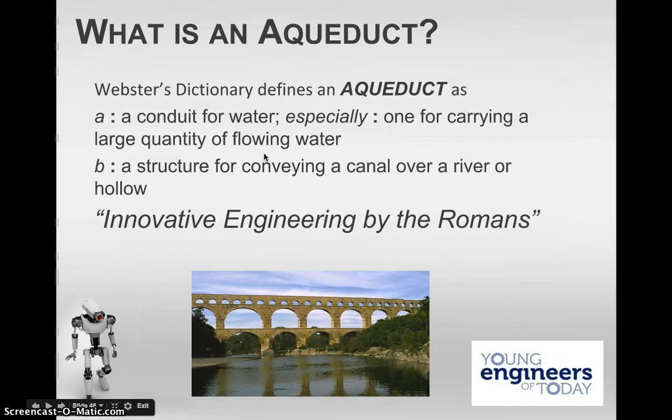Aqueducts were created by the Romans as the Roman Empire grew. And they developed this extensive system of aqueducts to deliver surface water by gravity on a gradient to cities. As the cities grew, especially in Rome, the city grew and the Tiber River wasn't large enough to continue growth.

Water is delivered to fountains and baths where citizens collect and use it. These fountains were very elaborate and quite large. And the other positive that these fountains did was, especially in warmer times of the year, it would allow mist and moisture in the air as it was splashing about through these fountains, actually cooling off the areas of the city. It allowed cities to grow in size.

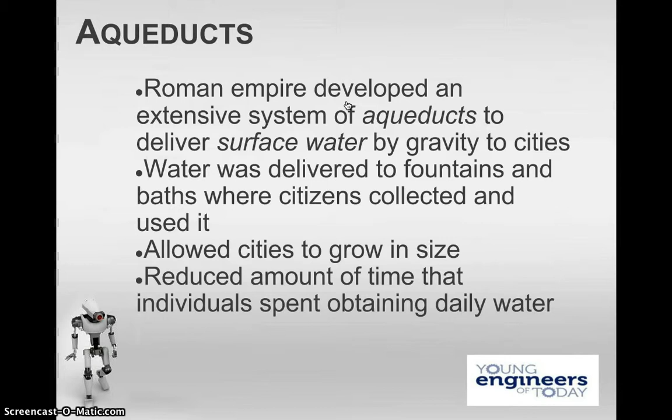Water and food are highly important to life. And when you are spending most of your time being a hunter and gatherer, it's hard to develop culture, philosophy, art, science, math, recording history. It becomes a burdensome task because you are spending all your time trying to either find fresh water or find food. When you're able to do that and you have sustainability and a city is able to grow and society is flourishing, it's a result of having water and food at the basis.

The history of the aqueducts: at first the Romans' recourse, as I said, was the Tiber and wells, but water obtained from these sources was polluted because of the growth of humans and humans polluting things, which still happens today. That's the reason they had to find a new source of fresh water.

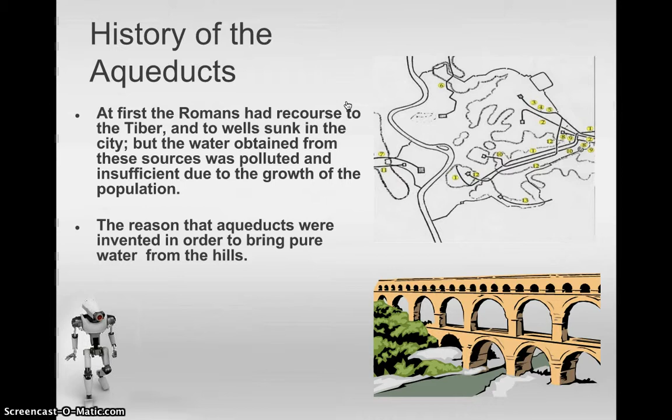Aqueducts were invented in order to bring pure water from the hills. The date the first aqueduct was assigned is 313 BC. The number of aqueducts was gradually increased, partly at the public expense and partly by munificence of individuals. So people were paying for it directly.

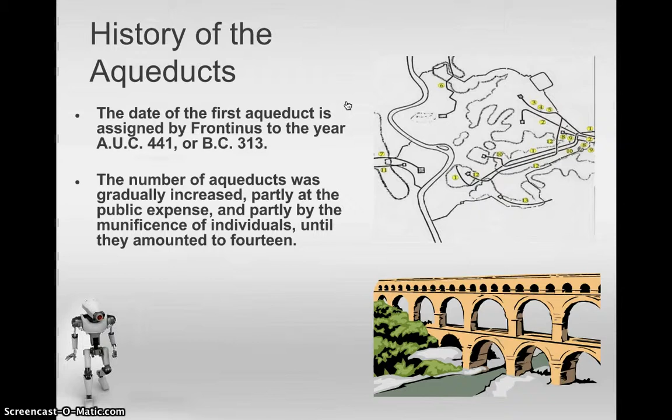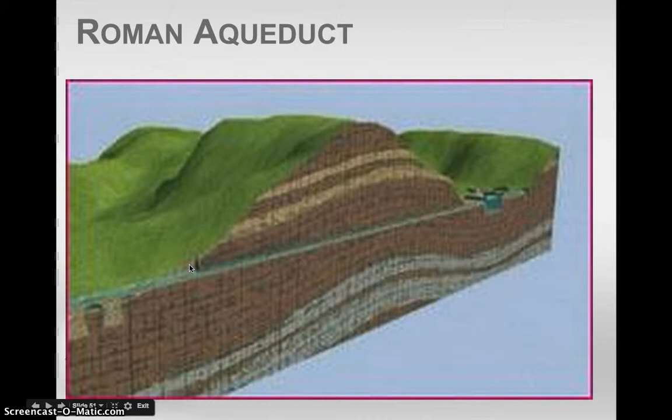Now, these are some of the major questions that need to be considered when designing an aqueduct. Obstacles, as we talked about, the engineers run into when designing these: valleys, hills, keeping the water clean while it's moving. These challenges were overcome by creating these aqueducts, these tunnels, these filtration areas. Okay. And I would say today's modern version of aqueducts is a mass array of underground plumbing that ships water all around and removes it as well through sewage pipes.

Here's a side view of the anatomy of an aqueduct system, starting at the source here, and the drop shafts, the settling tank. With water, things that are more dense will drop to the bottom and the water will flow. So it's almost a filtration process. Tunnel and shafts, tunneling through help create airflow.

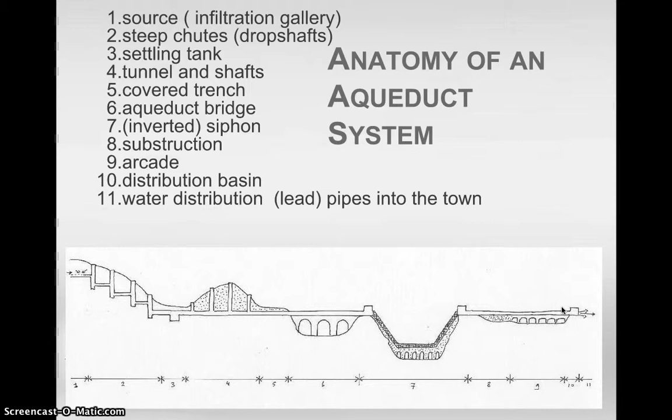So as they move through, you have your arcades, you have your inverted siphon, which, as long as this one side is higher here and the pressure is stable, will move through these valleys and actually push the water up. And then the only downside here is the lead pipes. Lead pipes were even still used in the 1800s, but you'll get lead poisoning.

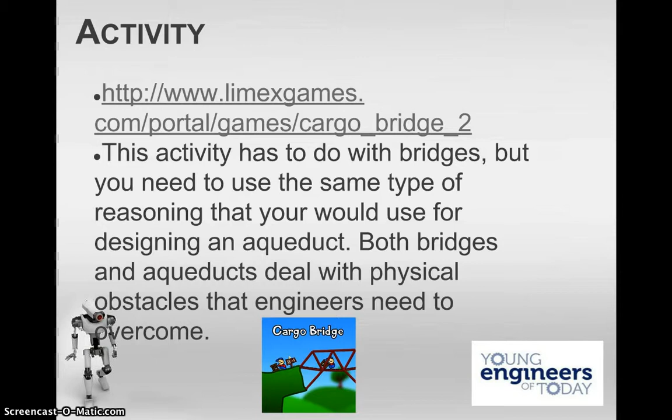Now, this link above is called Cargo Bridge. Granted, you might be wondering, Mr. Taylor, why are we doing bridges? Now, the point of this is, this actually has to do with bridges, but you need to use the same type of reasoning that you would use with designing an aqueduct. Both bridge and aqueduct deal with physical obstacles that engineers need to overcome. So go ahead and play that. It's an enjoyable game.

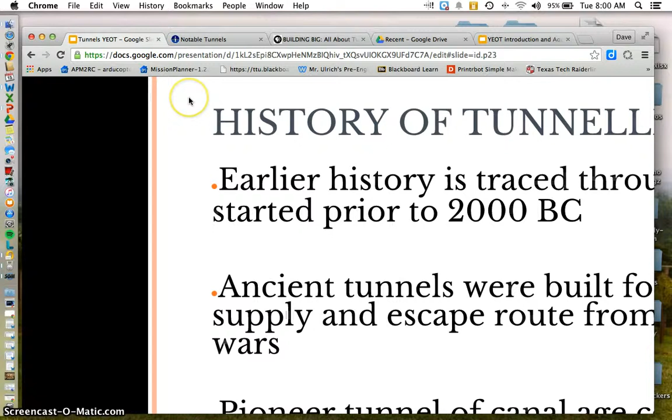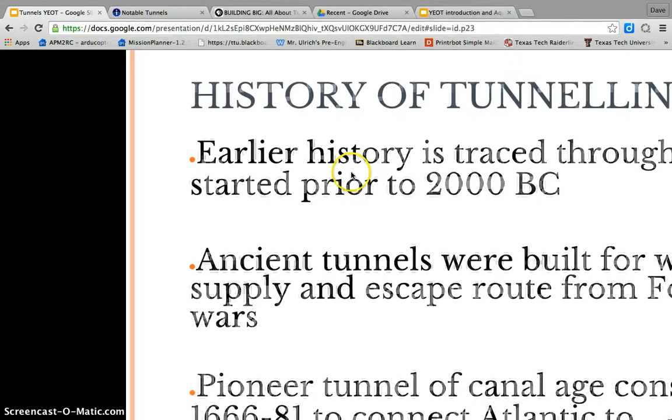Now, just a few review questions that'll help you recap after watching the videos and etc. Okay, we're going to change gears now, and we're going to go with tunnels. Let's get this presenting to you. All right.

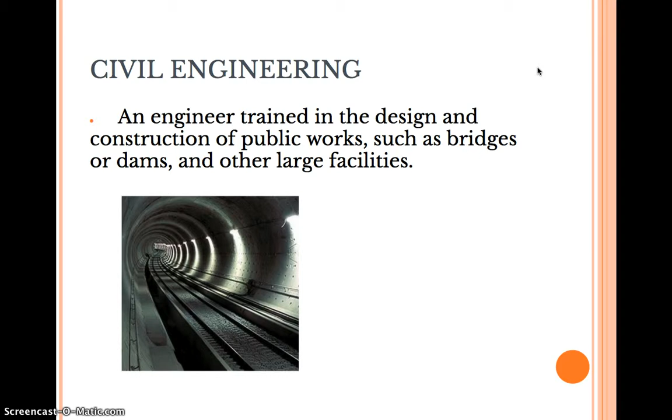Okay, tunnels. Tunnels are created by civil engineers. Civil engineers are trained in the design and construction of public works such as bridges or dams and other large facilities. Once again, I have a video here that I recommend you watch. It talks about what engineers do.

And then realizing how long some of these tunnels are, like the English Channel Tunnel that connects England and France, is 31 miles long. Imagine being underground for 31 miles. Very impressive. Amazing engineering.

History of tunneling. Early history is traced through mining, started prior to 2000 BC. Ancient tunnels were built for water supply and escape routes from forts during wars. So like secret passageways.

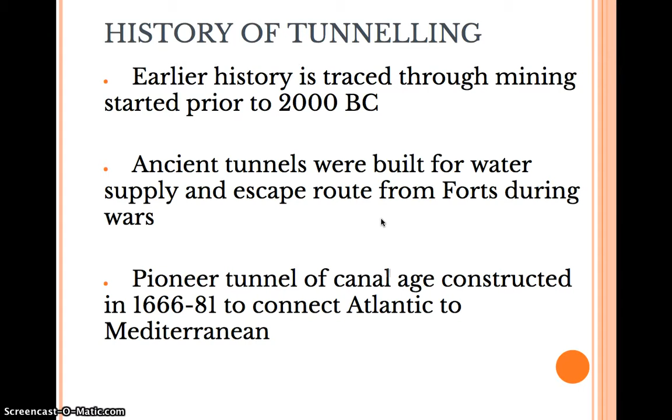Pioneer Tunnel of the Canal Age, constructed in 1666 through 1681 to connect the Atlantic and Mediterranean, lower European, Northern Africa area. Gunpowder was used for the first time in tunneling there due to the importance of water transportation. The canal system developed in England and other countries in the 18th century, leading to construction of a number of tunnels.

If you go in the English countryside, there are all these small little canal rivers that were built off main rivers to help with transporting goods. I was in England this summer and saw them. They're quite impressive, but they're all over the countryside for shipping things. So it's more efficient.

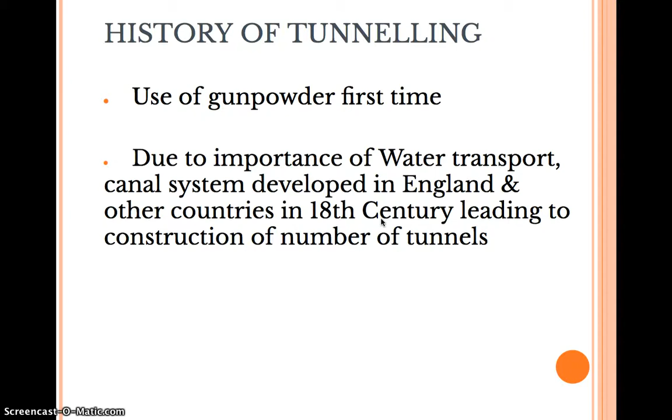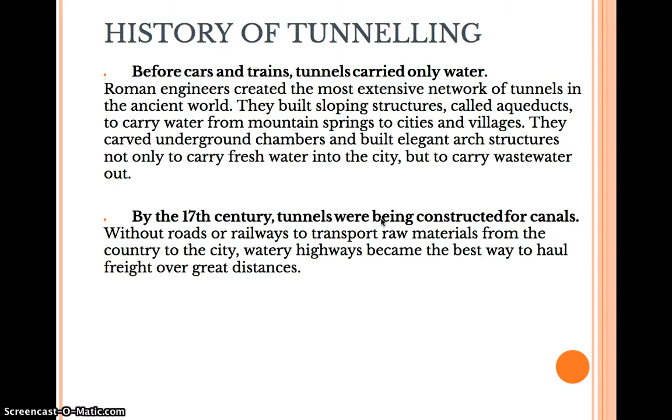And before cars and trains, tunnels carried only water, as we talked about with the Roman aqueduct. By the 17th century, tunnels were being constructed for canals. Because we didn't have roads for cars and vehicles or railroads for trains, waterways were the highways to move freight over great distances.

With trains and cars came tremendous expansion in tunnel construction during the 19th and 20th century. The development of railroads and motor vehicle transportation led to bigger and better and longer tunnels. If you ever had the opportunity to drive through any mountainous area in the U.S., there's a lot of tunnels.

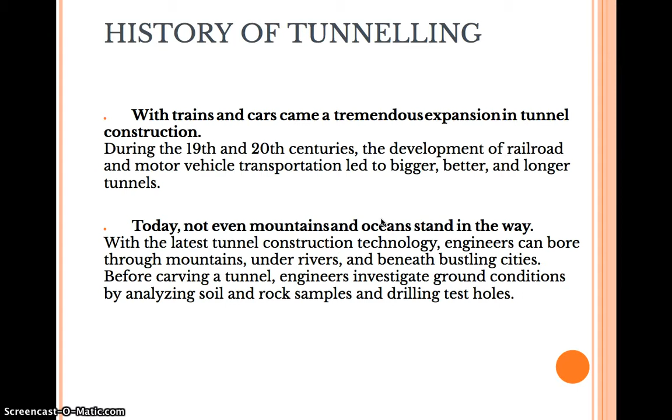There's tunnels in the Appalachian Mountains in the Northeast. I grew up in western Pennsylvania, and there's quite a few tunnels around Pittsburgh. Today, not even mountains or oceans stand in the way. Okay. Some images of the evolution of tunnels.

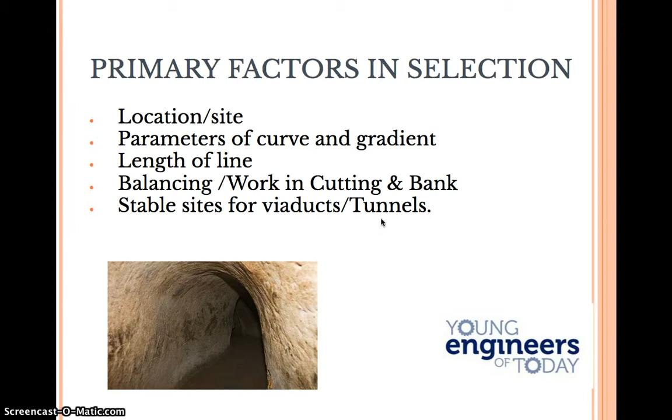Now, primary factors in selection: the choice of tunneling method may be dictated by geological and hydrological conditions, geo meaning earth, hydro meaning water, cross-section, length of continuous tunnel, local experience, time and cost considerations. What is the value of time in the project? Meaning how long do you want it to take?

Limit of surface disturbance. Say it's a subway. You're building underneath a city that is already developed. How is that going to affect the day-to-day functions of that city above? And many other factors, all right? This has been a recap.